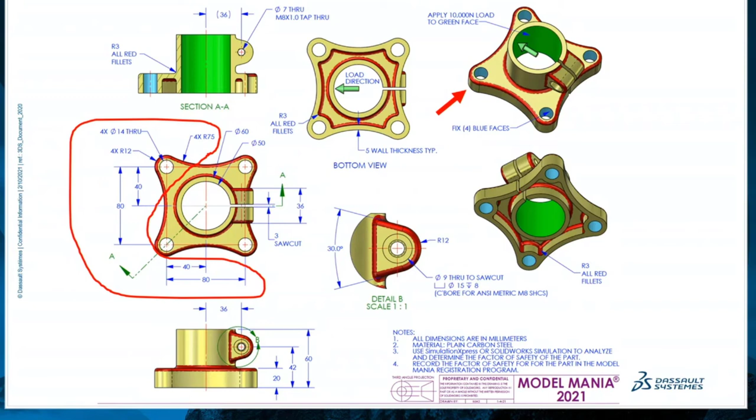Start. If I'm looking at this part, I see that cylindrical boss down the center, probably something I'm going to start with. I'll take a look at that. And then I see this base plate at the bottom there, and that has some hole locations, 80 millimeters in each direction, and it's got that big 75 millimeter radius at the top and a couple of holes. And that looks like I either pattern that with a linear pattern or maybe I'll do a circular pattern for that.

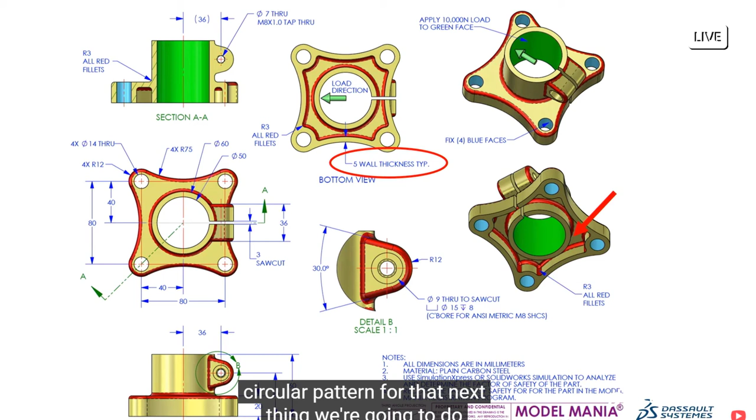Next thing we're going to do, we're going to shell that out. If I look at this, that whole bottom pocket, that whole bottom piece is basically a shell, but I don't want to shell all the other stuff at the top. Then we're going to put this clamping boss on the side. So you can see the dimensions that are located for that there. We'll go ahead and add that.

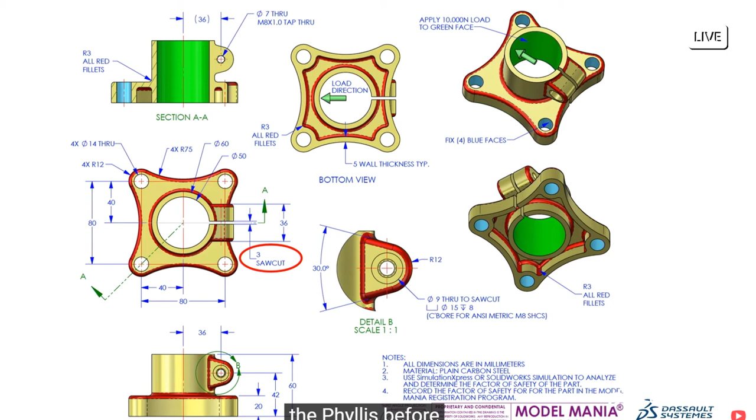Then I'm going to add the fillets. I'm going to add the fillets before I put the saw cut and the holes in, and we'll see why I do that. It makes it a little bit easier for picking the edges or the faces that I need to fillet. The next thing I'm going to do is add a 3 millimeter saw cut that kind of opens up my part so I can do the clamping. Next, we got some holes.

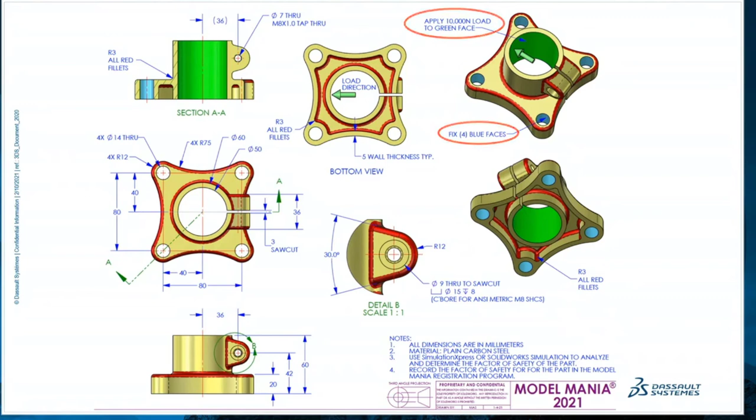So I have an 8 millimeter counterbore for an M8 socket head cap screw, and on the far side I have that tapped hole for that same thing. And then we're going to apply our material, and the last thing we're going to do is run our simulation. So let's get started. Let's actually do a little run through of how we would go through this here.

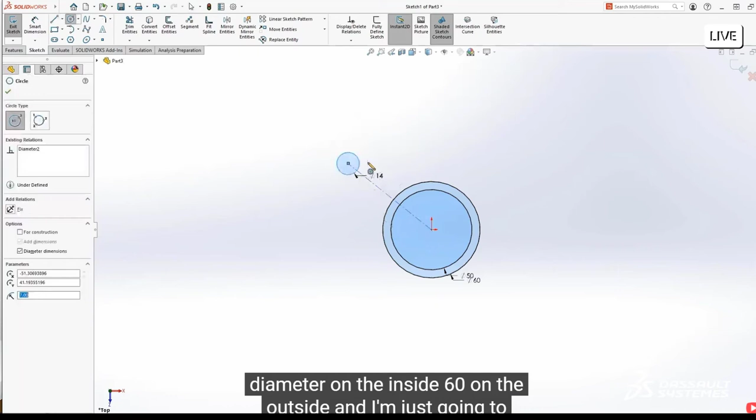I'm going to start on the top plane. Again, that big cylindrical boss that I had there, that's a 50 millimeter diameter on the inside, 60 on the outside. And I'm just going to put everything in a single sketch. One of the things I'm going to do is locate those holes that I had out there. The diameter is 14 millimeters and 12 times 2, or 24, for the radius of that. The reason I'm adding that here is I want to put everything in this one sketch because I think it's going to help me later on.

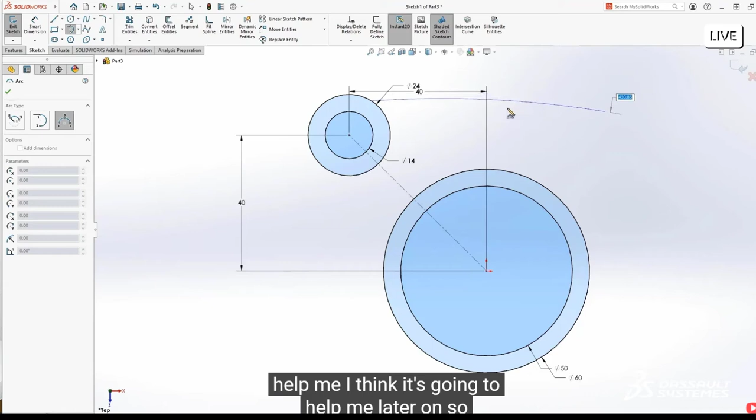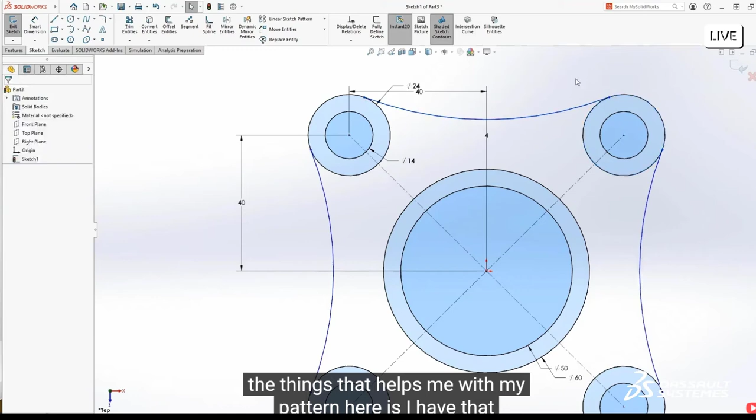So 40 and 40, I want to pattern that around. I'm going to use the sketch pattern here to do that. But before I do that, I want to add this arc here. That's a 75 millimeter arc that I'm going to add. Actually, we don't even add the dimension, but I want to make sure that's tangent because I'm going to pattern that around. Now, one of the things that helps me with my pattern here is I have that center line that goes to the vertex, the center, the origin of the part, and that helps lock everything down. You could do the same thing without that line in there, and you'd see what happens. We'll attach that arc to the circle on the side, and we'll add a tangent relationship and a dimension of 75, and we'll extrude it.

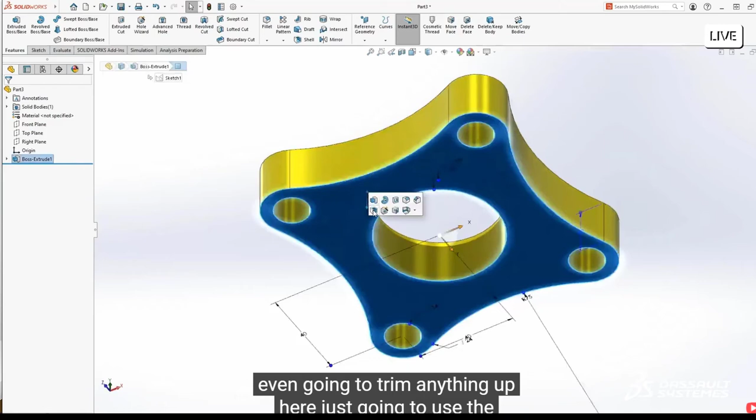I'm not even going to trim anything up here, just going to use the contours, grab these contours here. We're going to drag that out. That's going to be 20 millimeters in depth, and there we go. On the bottom, I'm going to shell that out. So while it's still early here, I'm going to go ahead and shell this. 5 millimeters of wall thickness there. Go ahead and shell that out.

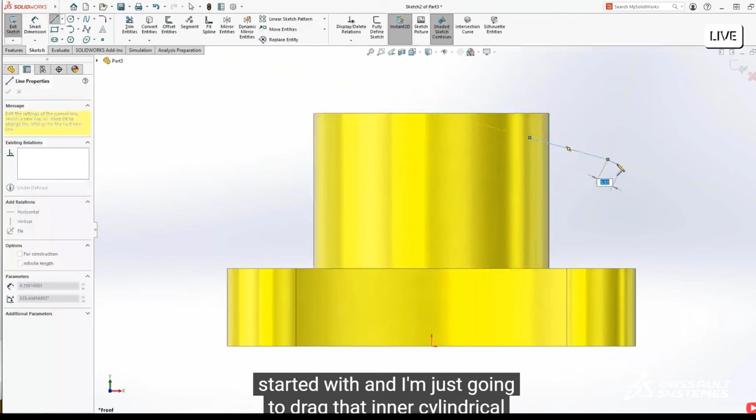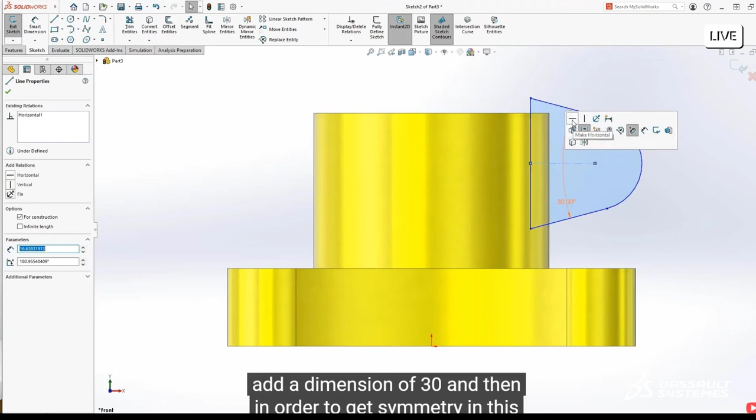Next, we're going to take that same sketch that we started with, and I'm just going to drag that inner cylindrical boss, if you will, those two circles, and just drag that up. That's 60 millimeters. Now we'll put on the clamping boss, that angled thing that goes on the side, transition immediately into an arc, just transition away at tangency there, and just draw out my shape. This is going to be 12 millimeters is the dimension for that, and then I'm going to add a dimension of 30. And then in order to get symmetry in this part, I'm going to create a center line between the center of that arc and the midpoint of that line and make that line horizontal. That establishes my symmetry for me.

We'll add some dimensions here. It's going to be 36 millimeters from the central axis, and then from the bottom it's going to be 42 millimeters to locate that.

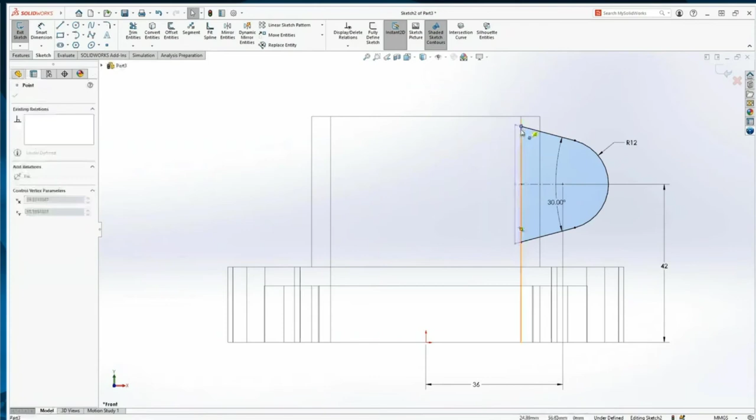I still have one blue line under constrained line. I want to go ahead and constrain that, so I'm going to do that by turning off my shaded and turning on my wireframe, and just go ahead and lock that onto that inside bore. Now I won't have any extra material on the inside.

Here I'm just going to use Instant 3D and drag that out. And a tip I learned from Buzz on Monday is that I can just use the M key to hold that down, and it builds a midpoint relationship there.

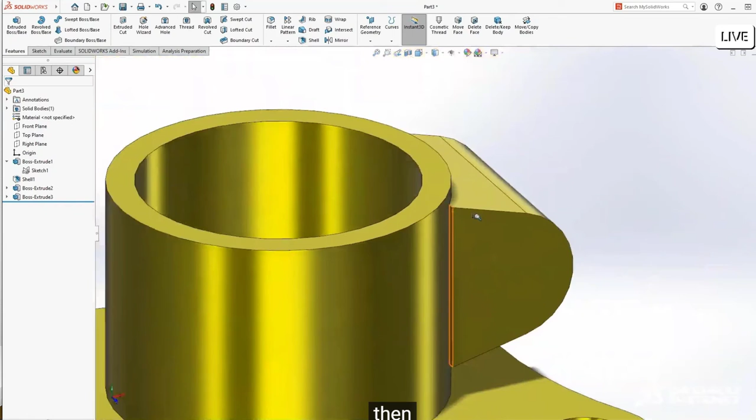When I see these extra little faces like that, first thing I think of is delete face. I got this extra little geometry, delete those two faces, use the selection helper to get the all planar faces, and it chooses both sides for me, and there we go.

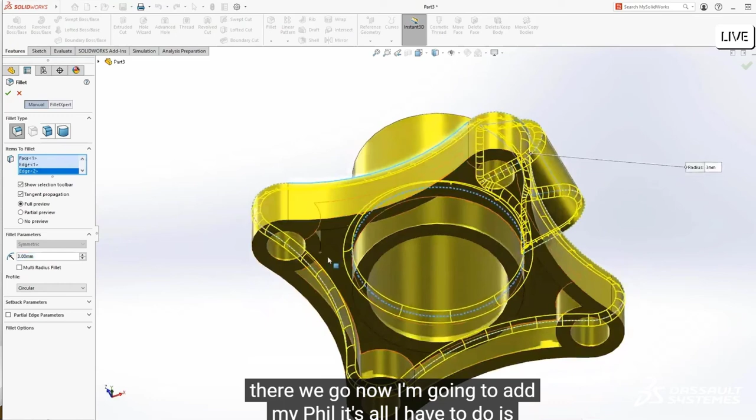Now I'm going to add my fillets. All I had to do is choose that one face, and it wraps that fillet all the way around that part for me. We'll choose the bottom face, one of those vertical edges, and then use the selection helper to get all the other 7 that are very similar to it. It saves me some steps there.

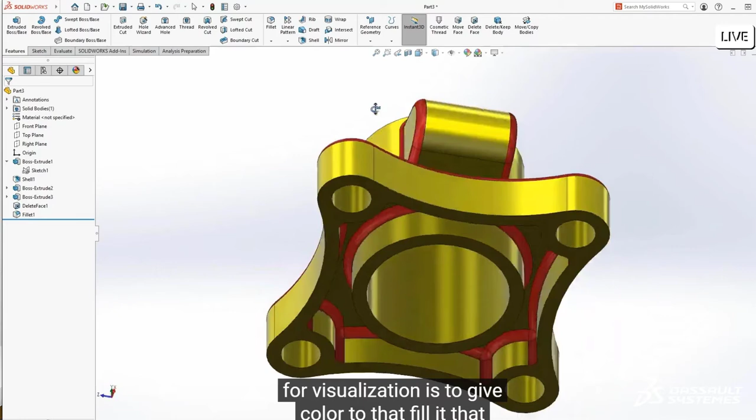Now this isn't necessary, but it helps me for visualization to give color to that fillet feature there. And you can see then I can see all my fillets wrap around my model as I'd expected. I'm not missing any edges. And actually, when I grade these parts, I'm always highlighting that face so I get that color so I can make sure that they're all there.

Next, we'll add our saw cut. So this is just a single line that I'm going to draw, and I'm going to do a cut, and it's going to be a cut with a thin feature about the mid plane of 3 millimeters wide.

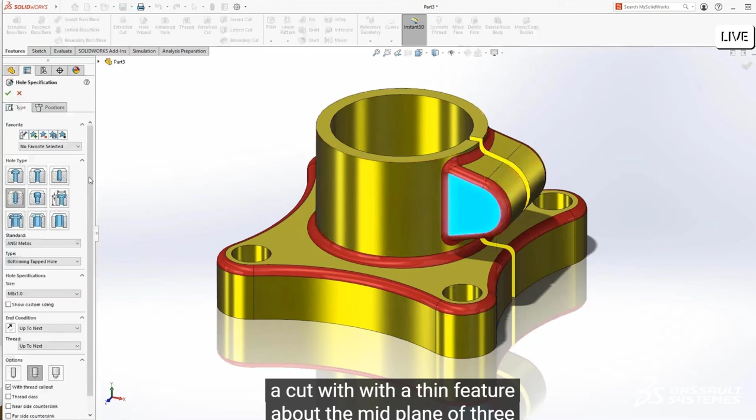Now we're going to use our hole wizard and put those holes in there. This is going to be an 8 millimeter counterbore hole. So we use a socket head cap screw, use all the capabilities of hole wizard to define that, so I don't have to model that in there.

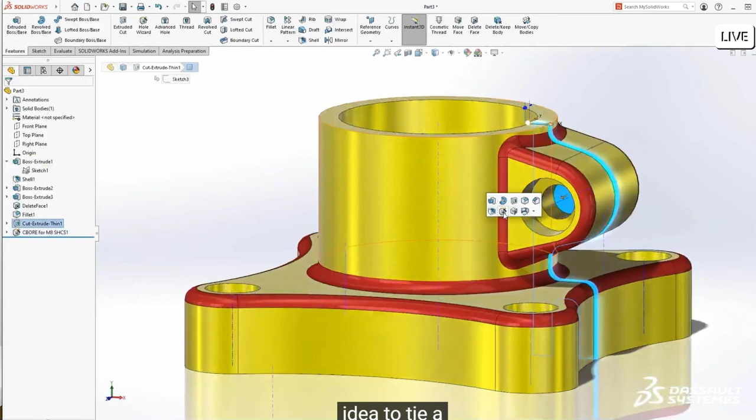What I'm going to do is turn on my temporary axis. It's never a good idea to tie a hole or a feature to an edge of a fillet. So I'm going to locate that hole to the temporary axis, so that makes that a little bit more robust of a model.

Next, we'll add the tapped hole. This is going to be an M8 tapped hole through all up to next. Either one works. Locate that on that temporary axis as well. And now we're good to go.

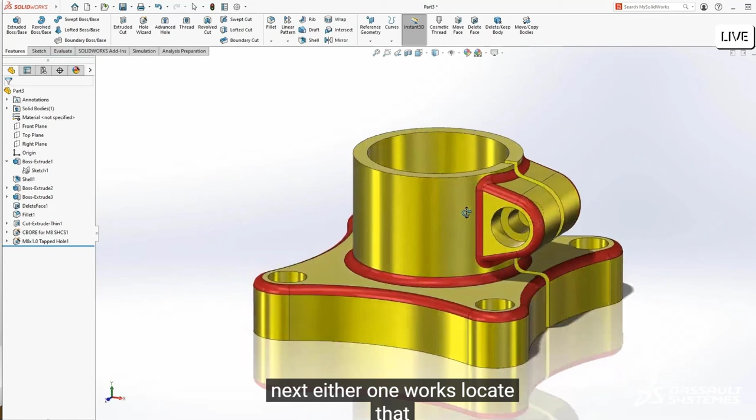So the last thing we need to do is check our model, make sure everything looks good. We need to make sure we apply our material, and that is going to be plain carbon steel. And there you have it. We've finished the model. Now, the next thing we ask you to do is run a simulation. So let's go ahead and do the simulation portion now.

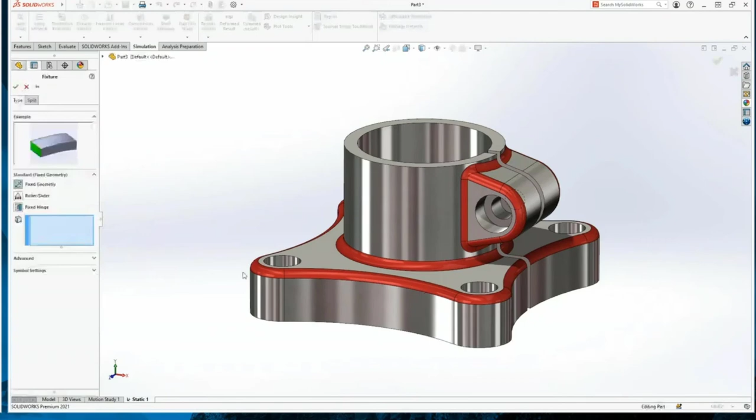You could use SOLIDWORKS Simulation or Simulation Express. I like to use SOLIDWORKS Simulation. We're going to hold with a fixed geometry type of restraint the 4 holes that locate this thing, and those are called out on the drawing. Those are going to be held as fixed.

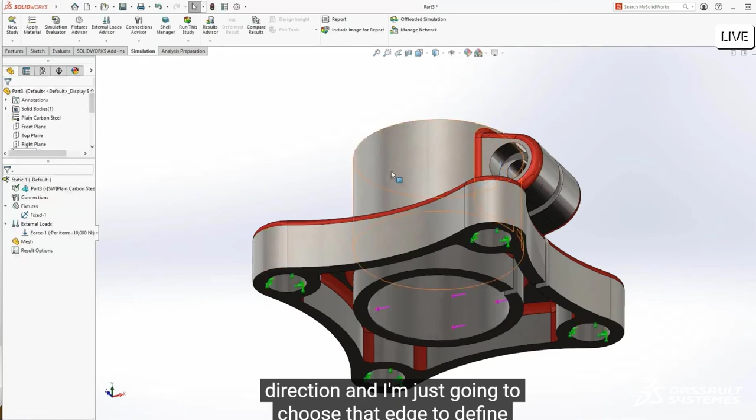And then we're going to apply a force to the inside bore of this thing, and it's going to be defined in a certain direction. And I'm just going to choose that edge to define the direction. We'll reverse that. 10,000 newtons is the load that we apply. And our model is set up. The last thing we need to do is hit run. And there it goes. It's going to go off and run.

We'll turn off our symbols here. I always like to animate my simulation to make sure it behaves as I'd expect. And sure enough, it does. So let's solve for our factor of safety, and it's around 3.3.

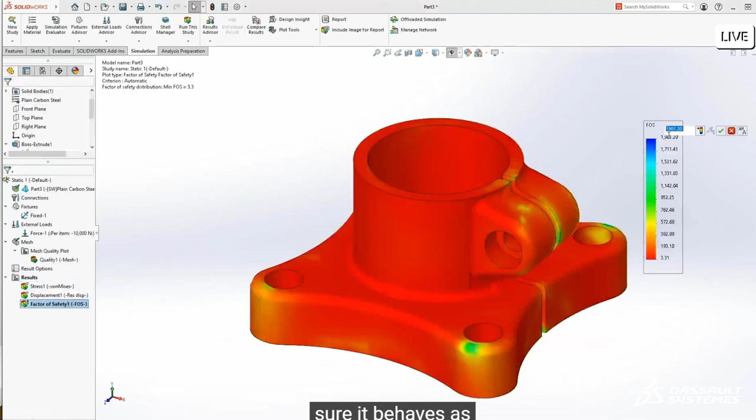This number varies depending on your mesh settings. When we're doing this live at World, I have control over the mesh settings and setting that up. Everybody's machine is different in the real world, so the factor of safety did vary a little bit, anywhere from 3 to 3.5.

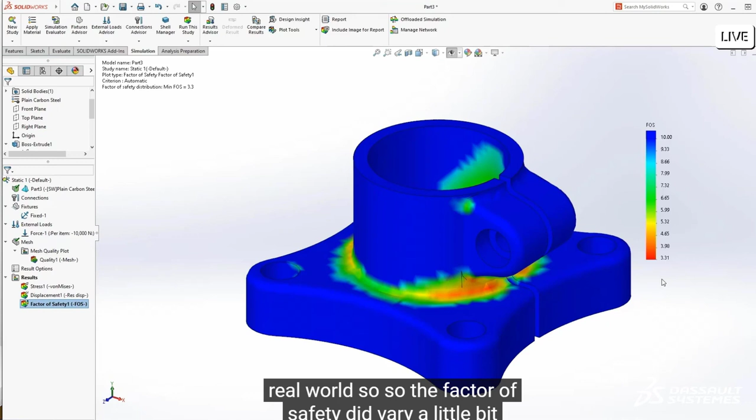All those are right. But what I do is I always go in and check to make sure your loads and boundary conditions are defined correctly. And that's really what I'm looking for there. So there you have it, Modelmania 2021.